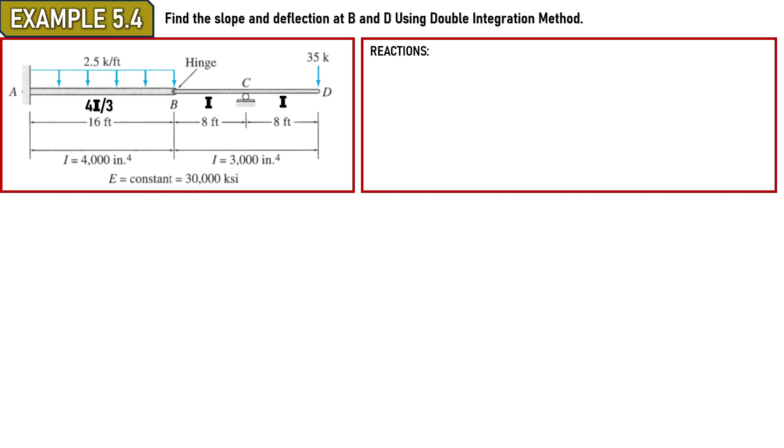Okay, say downward. Okay, if we take moment at B, so Cy times 8 minus 35 times 16 equals to 0, you'll get Cy as 70K. And yung RB mo using summation of forces along Y is 35. Then ilipat mo yun sa kabila.

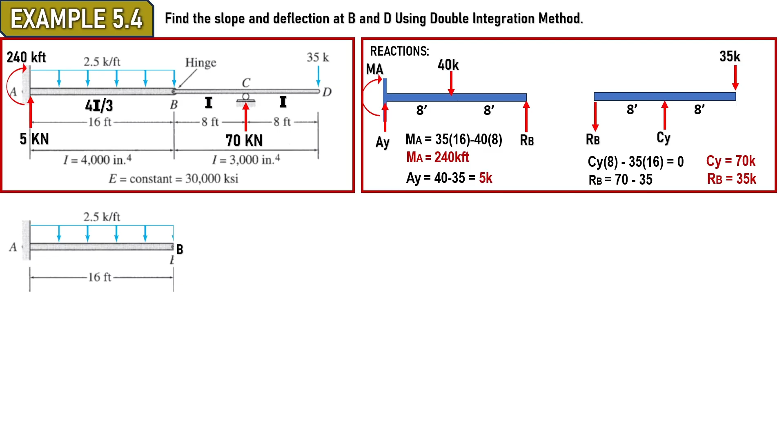So, kuha lang tayo ng singularity equation. If we take moment here, sa cut section, ang moment natin, assumption is counterclockwise positive moment dito. Yan yung moment natin. So, lahat ng counter ay positive. And ito nga yung equation natin. From the double integration concept, EI y double prime, or second derivative with respect to x, is the moment, diba? The moment equation.

So, moment equation, counterclockwise tayo, positive. So, kaya meron tayo ditong 240 positive plus 5x minus 1.25x squared. Saan galing yung 1.25x squared? Dito yun. 2.5 times x, x over 2 as the moment arm. So, 1.25x squared. Then, if we go with the other segment.

So, meron din tayo dito since the left member. So, counterclockwise moment here. So, this is my equation. 70 times x minus 8. So this moment arm is x minus 8. Naka-bracket siya kasi kung sakaling less than 8 yung ating x, masisiro lang to. So, minus 35 times x. So, dalawa ang ating moment equation, two segments.

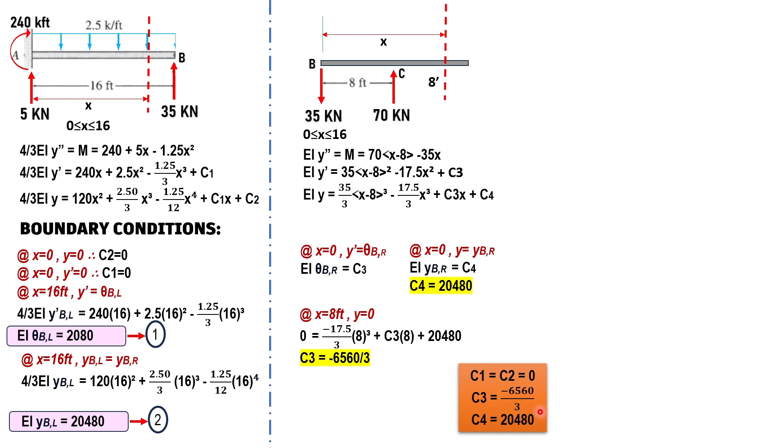So, 8. Ito masi 0. 8, 8. So, substitute lang. At saka ka ngayon makakakuha ng C3. C3 is negative 6560 over 3. So, tapos na tayo sa boundary conditions. Meron ka ng C1, C2, C3, C4. Okay? So, gamitin natin yan to get the final answers.

Okay? Segment AB muna tayo. Tinatanong tayo ng slope at deflection of B. So, pwede natin makuha dito sa segment AB ang deflection sa B left at slope at B left. So, if we want the slope at B left, use the equation 1. So, from the previous, actually, substitute nyo na lang yun. And then, i-times natin ang 12 squared para ma-convert yung ating units. Pero may napansin ako dito.

So, equate lang natin, 2080 times 12 squared over 30,000 times 3,000. Since your I is 3,000, 30,000 ang E mo. So, we have the slope at left B is 0.0033 rad. So, since positive yung sagot natin, ibig sabihin, your rotation is going counterclockwise po. Okay? Counterclockwise positive when we deal with slope of the point, no?

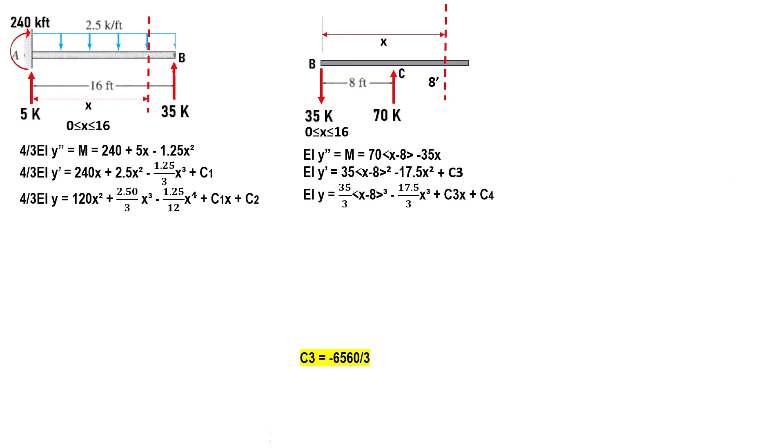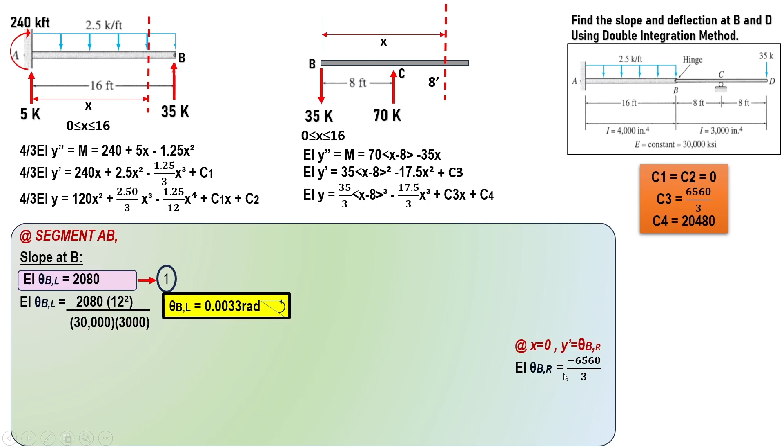So, meron tayong slope sa right. So, pwede nating makuha yun dito sa BCD. Ang slope sa right, you can use the equation kanina na EI theta BR is equal to C3. Diba? Sabi niya kanina doon sa ating previous slide. Yun, no? Ito. Kunin natin to. C3 is equal to this. So, therefore, pwede nating sabihin na EI, slope at B right, is equal to negative 6560 over 3. Okay? Yun na lang yun.

And then, substitute. Then, you'll get theta B at right is 0.0035 rad. But this time, a negative slope. So, that is clockwise. So, mukha silang parehas. Ibig sabihin, medyo malapit na sila sa zero slope, no? Okay? Or malapit na yung deflection niya. Okay? So, tapos na tayo sa slope at B.

Let's go with the deflection at B. So, kuha lang tayo ng deflection equation. Pero kunin natin at x 16. Pero nagawa na natin yun kanina. Yan yung nakuha natin, 20480. So, ilagay na lang natin yung conversion, 12 cubed over EI. So, we have 0.393 inch. And positive yung sagot ko. So, therefore, upward yung deflection. Okay? We have an upward deflection dito sa hinge B. So, tapos na tayo sa deflection.

Now, at segment BCD, we want to get the deflection and slope at D. Okay? So, slope at D, use the equation of slope here. Then, substitute the value of 16 kasi at x 16, yun ang D. Substitute the 16, we have negative 13280 over 3 times 12 squared over EI. So, substitute nyo lang yung 16 dito and then calculate that. Then, you have slope at D is 0.00708. Negative result siya, so ang slope mo ay clockwise. Okay? So, punta tayo sa deflection sa D.